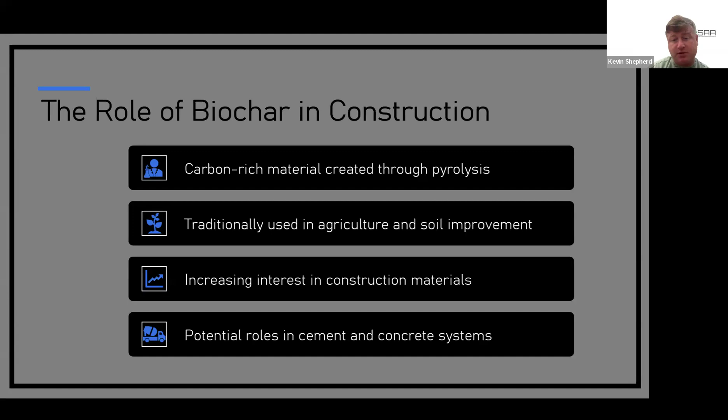In the standards that are actually being made, this is how it's going to be defined for biochar in concrete, right? You have your supplementary cementitious material, which is a partial cement replacement, which gives you a lot of your data for your GWP. We are also looking into replacing sand in urban dense cities like New York. Sand is harder and harder to get, and people are having to make more sand or alternatives to sand. So biochar could be replacing sand in some applications with some different feedstocks.

And honestly, the CO2 reduction. If you have a cement replacement and it's carbon focused, I think you have a better product than if it's just a cement replacement to replace cement's GWP, if that makes any sense. But what it's being used for in the industry is to reduce the CO2 in the concrete mix.

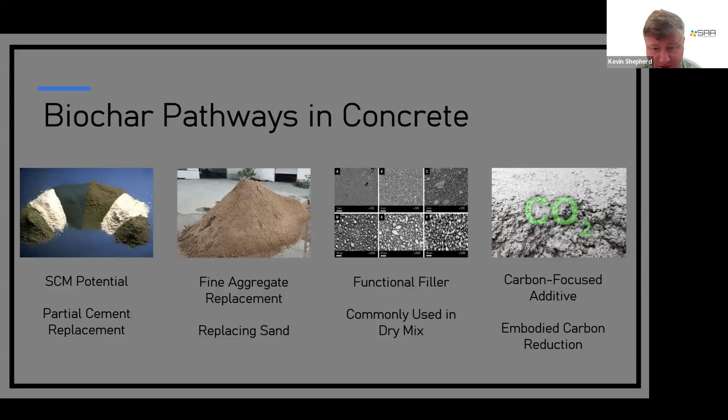So my opinion on the challenges: I think there's inconsistent product claims. I think the market messaging is being held up because of some of the stories being told, and I'm not pointing fingers, but sometimes it's a lot of snake oil trying to get carbon credits and things like that. Where in our industry, when structural components matter, that kind of ruins the reputation of it.

Limited standards and testing framework. We can't scale without these standards. We need testing methods. We need standards of those testing methods for performance, and they're not quite there, even though they're being made. Prices vary widely across producers.

So, in my experience, and I'm not going to ever name names, but I've been quoted anywhere from $200 a ton to $850 a ton to $2,000 a ton. If we want to impact the market, we kind of need to come together and make sure that our prices are kind of close, right? That's a big reason why a lot of people are turning their heads to it.

Engineering guidance is still developing. All these materials, all these feedstocks, which I'll get into, there's a lot of engineering to it. We're engineering it to the application that it's being used for. We can't just do the same process and put it into building materials that are structural, right? It needs to have a lot of engineering to it to keep it consistent, so that materials could be used consistently.

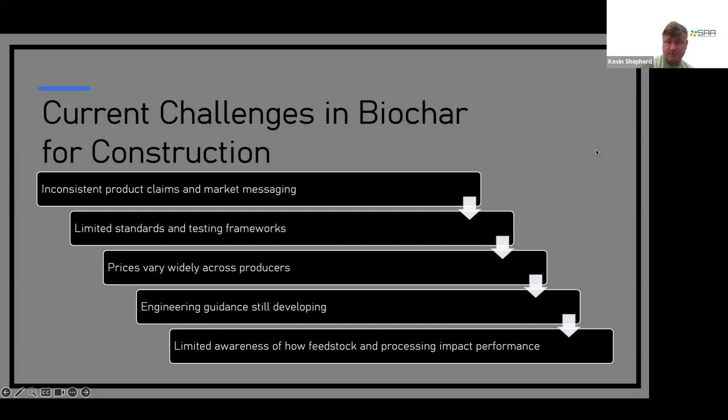Okay, why the biochar materials differ and why that consistency matters and why the engineering matters a lot is the feedstock. Right now, the big topic is rice husk. I know we mess with softwoods, hardwoods, contaminated woods, and municipal solid waste is coming out, and we have different types of agricultural waste from different Brazilian peppers and all types of stuff that we've handled.

The pyrolysis is different. You have fast pyrolysis, slow pyrolysis, gasification, all at different temperatures. It's being studied right now how this actually works, but there's no actual solution and actual guideline of how to pyrolyze this to be good for construction materials and low embodied carbon materials. Your particle size. From what I see, particle sizes are all over the place. And when you try to get to a certain particle size, which we'll talk about, it could ruin equipment. There has to be engineering, there has to be processing.

The chemistries, the physical chemistry to this from stuff that we're testing is all over the place. It's different. Sometimes you have high silicas, sometimes you don't, sometimes you have good reactivity, sometimes you could read high carbon, sometimes you read low carbon. So this is what is the concern, and I know everybody is aware of this, but we have to kind of come together and talk about this if we want to make it feasible for an industry like concrete.

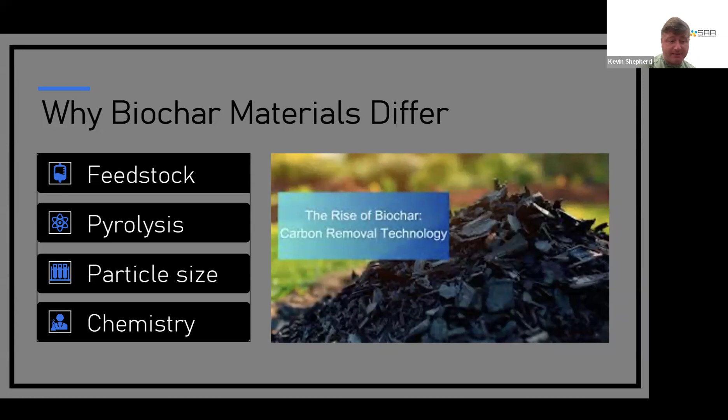So processing pathways for construction application. Pyrolysis and gasification: what I'm seeing is slow pyrolysis and fast pyrolysis are the best materials for this. Best controlled, best consistency that we've tested. The feedstock variability: we're kind of limiting the feedstock in the concrete industry to be high in silicas, high in carbon, or engineered almost like a geopolymer cement where a couple biochars are blended together.

Grinding and particle size control, that's a huge thing for the process. I think if people are figuring out what screen size and how to grind this without maintaining equipment and keeping that equipment durable for a long period of time, that will impact the price. Keeping consistent particle size that isn't too fine, that isn't too expensive, and finding the balance between moisture and performance really and particle size.

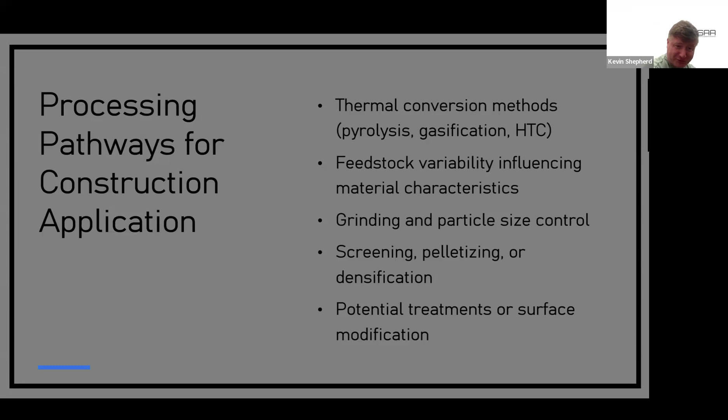Screening, you could pelletize this stuff and you could also densify it, right? So there's different applications and different processing to get to that particle size. And then you may even have potential treatments for the particle size and the surface modifications to this stuff. So I guess what I'm saying here is in order to get to the application of construction, there is a lot of research we are doing.

How synthetic aggregates supports biochar in the construction industry is we have a lot of representation on the ASTM biochar in concrete standard that's being developed. From my knowledge and from my experience, I think it is being developed a lot quicker in ASTM than your average. I think there's a huge push on it.

I know Lori Tunstall from Colorado School of Mines is leading that, and some of the industry support that are a part of SA, like ZeroTwelve and Solid Carbon, are a heavy advocate in that biochar standard, and they have experience, which we'll go talk about.

The advocacy for inclusion of carbon-based materials in non-structural applications in city specifications. So getting involved with construction specifiers to take it to the city where they could require using this in sidewalks, using this in blocks and stuff like that for certain government projects or city projects that they want to do. I think that's huge.

I think what we're missing there is actually people understanding how to specify this stuff. Before it even has a standard it is hard, but there are ways to specify it and actually go to the cities and get them to use this. But you need the data, right? And how do we get the data? By collaborating with researchers. I know I skipped the point there, but we really do need to collaborate with the universities, collaborate with the industry, and collaborate with the corporations and small businesses.

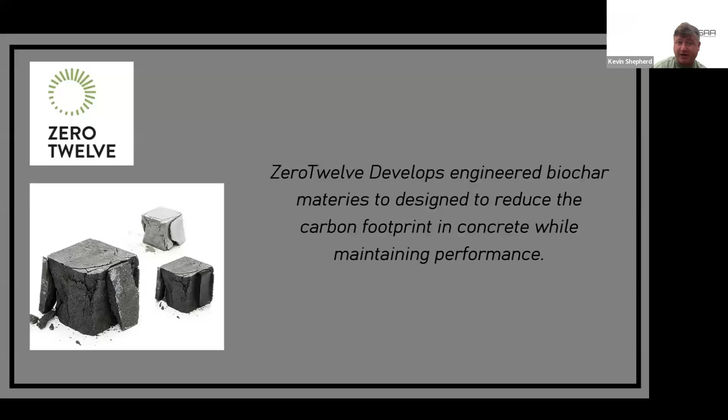So it's great to see a company like ZeroTwelve a part of SA. I think a lot of you, if you're into biochar, would know about ZeroTwelve and what they're doing, but I just want to give recognition to a couple companies that are a part of SA here. They're located in Colorado. So if you ever need anything, feel free to reach out and I could connect you. Solid Carbon is also somebody who's engineering biochars to incorporate into concrete specifically.

Ferris Engineered Wood up in Oregon as well. I didn't really understand how a cogeneration plant made biochar as a byproduct until I went there and saw it. It's a very cool operation; they actually supply power to 10,000 homes around them, and they do mass lumber. So they build really cool stuff, and they have this waste, and there's a lot of it that they're trying to get rid of right now. They're in the agricultural industry a lot, but they're trying to push their way into the construction industry by testing and modifying their process and how their char is produced right now. Well, not produced, but I guess delivered to the end client.

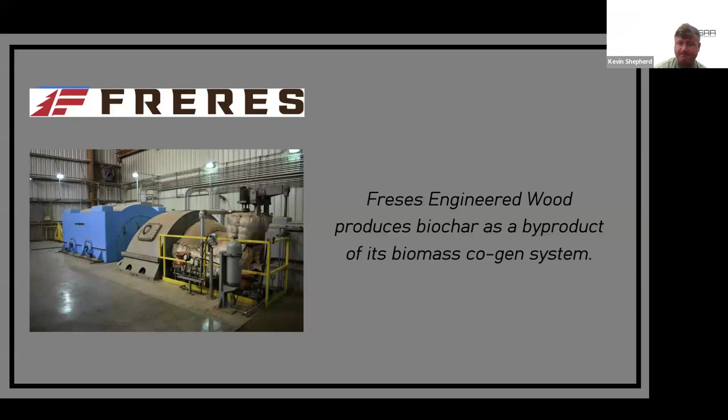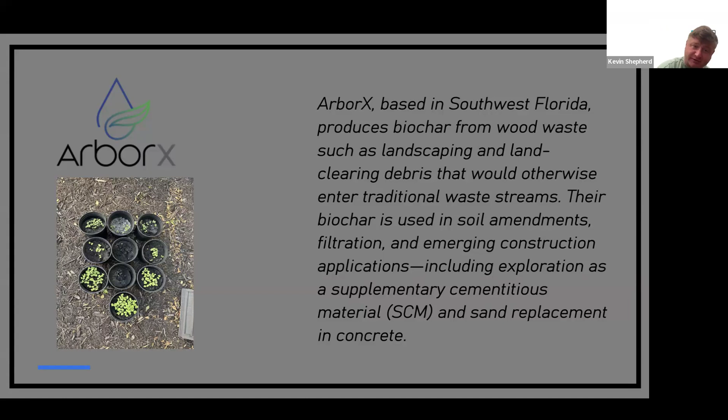ArborX is in Southwest Florida, near Naples. ArborX has a machine called the Char Boss, and they've got it up and running recently where they're taking clearing debris from land out there, different types of waste streams from Brazilian peppers to different types of agricultural products. They've done a great job recently working with carbon credits and getting into that system, talking to some of these data centers, I've noticed, but they are trying to get into actually creating a product for supplementary cementitious materials and sand replacements. So they're starting to really become a leader in the construction industry for biochar as well, for concrete, and looking into it at least.

Kevin Bernard with Mobile Biochar Systems. Kevin does fast pyrolysis, and he has a very unique type of system. He can make a kiln pretty easily and bring it to you mobile, right? For small scale operators to produce biochar and avoid their waste. Kevin and I have been working together to try to figure out what type of materials he produces with fast pyrolysis I could take and introduce to the industry and see how that performs and how that data looks.

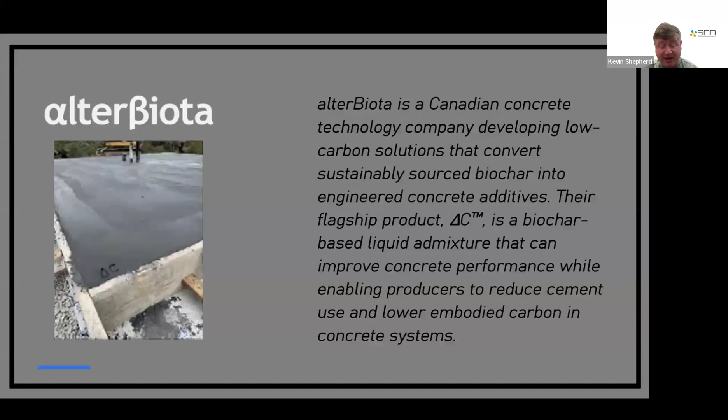alterBiota is a Canadian company who has a liquid concrete admixture with biochar. It's suspended. And as you can see over here, they get that really black concrete that I like. So I think their product is, like I said, leading in the industry with the standard. Alex Hanmore over there is a very good technical writer, good for lobbying, good for getting this into standards. And I could see this company really doing a good job with this concrete additive in the future. It reduces cement and it has a lower embodied carbon than typical.

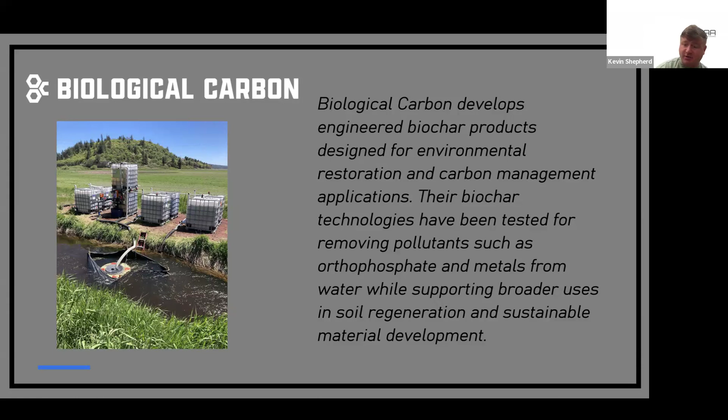Biological Carbon is also out in Oregon. John Miedema is honestly one of my mentors, and he engineers biochars for all different applications, water treatment, soils. He looks into the arsenic that's in there. He looks into the phosphates. He is a real good mentor of mine and has taught me a lot of what I know. He's told me where the snake oil is. He's told me what the problem is with it, and I see him working daily to solve the problems of the biochar industry. And another reason why, when we started synthetic aggregates, we defined biochar into this is to support his research and the stuff that he does. He's been doing some really cool projects all around. So if anybody ever wants to reach out to him, feel free, or bring any questions about them to me as well.

And once we start selling this product, so we've done great collaborating. In the Synthetic Aggregate Association, a lot of these biochar companies are working with each other, listening to each other's advice, and actually trying to explore different options together. So we're not taking it as competitive. We are actually trying to develop the market.

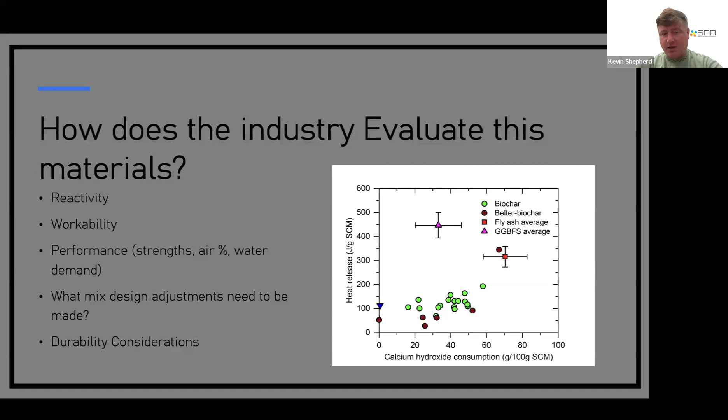Durability considerations. A lot of the companies that are in our association are looking into it, but I don't see a lot of durability considerations around these materials. However that's tested, I think we need to prove that when this material goes into concrete, it will last the same as that old mix design that we are at. And I do see some issues in the field with this, so that's why I recognize it.

The challenges with the carbon-based materials is kind of what I was just getting into, but the water demand, the air entrainment, the workability, and the consistency are a huge thing for engineering this right now. It's hard to balance those three when you're making these products, but I mean, it has been proved that it could be done.

But the processing cost, what is the ROI? What is the CapEx? I think these have been a real struggle for some companies to figure out, especially in today's economy. Transportation, where is the material going to go to and how far? For it to work in construction, it really needs to stay in a 100-mile radius. A lot of people will say 500-mile radius, but not when it comes to concrete. Concrete is kind of cheap. It's a low value product. We need to keep it low value in order to sell this stuff. So we really want to be looking for offtakers and feedstock suppliers around that 100-mile radius of wherever we're processing this.

Blending cost. You're gonna have to blend this stuff either before or after with some things, in my opinion. It's happening, and I think that's what we need to look at. And the cost actually at the blending plants as well, or batching plants, if they need to put any investment in to actually move this material.

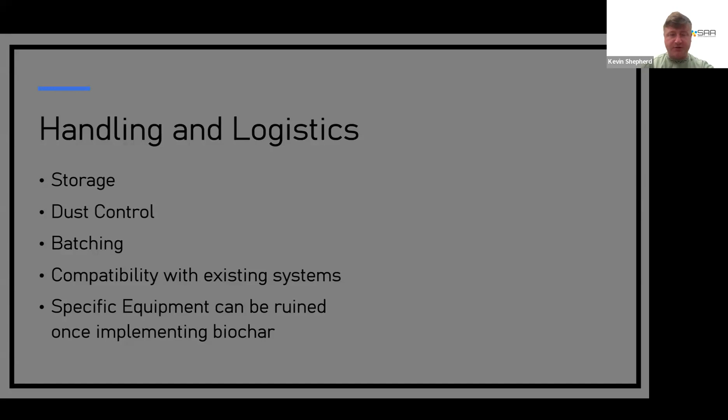This all needs to be researched and looked at before, because if we're renting rail cars and we put biochar in it and there's a little bit of moisture, it could ruin that rail car from ever putting anything else into it, right? Or that pneumatic truck that we're getting from a broker, unless we buy our own trucks, which puts the price a lot higher. Again, this is the stuff that I see in the field, guys. I love the biochar. I am telling everybody the concerns of the things that I see in the field.

What do engineers need to see? They want to see test data. I know I said the engineer is the most important to raise awareness to for this product in the beginning, but once you say where's the testing, what are the performance benchmarks, what are we looking at here? What's the long-term durability? What test methods did you use? Whether it is for the road or the pavements, did you go to NRMCA? Did you go through ACI? Did you go through ASTM? What ICC testing? What methods did you use? They want to understand all that.

And that becomes expensive for these companies that are trying to develop biochar. A lot of the companies that are developing biochar have the feedstock to biochar, but aren't in position to do $1 million worth of testing or $500,000 worth of testing to actually understand this product. And that's what the engineers are going to want to see.

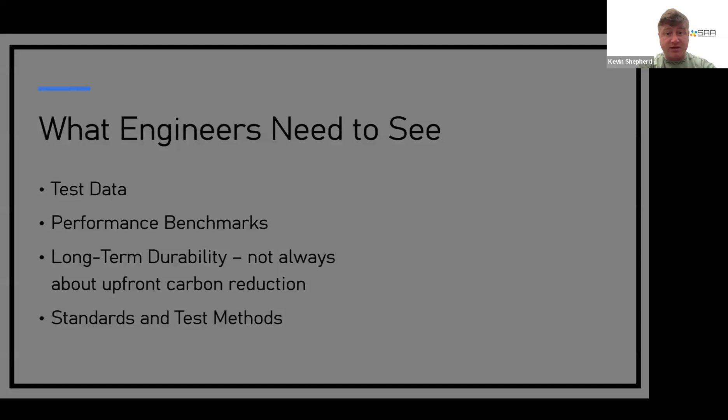All right, I've been talking a lot, so I'm coming up towards the last of the slides, but I did want to go over some of the other companies' work that are within SAA and go through it real quick with you guys to show you the potential that's out there. Agriplex is a ground glass company. They actually make ground glass as an SCM, so they would be almost a competitor to biochar right now. Rebind makes fibers out of baling twine. They take the ropes from the baling twine and make it into an applicable fiber for the concrete industry.

Local biochar, now mobile biochar with Kevin Bernard. Reboom America is a screening company that we've used for some of these aggregates. Agsco is up in Pennsylvania and could blend some of these materials together. Outside the Box Materials is making a unique cement replacement that's low embodied carbon, also looking into some of the biochar products. Climate Earth is a part of our association to tell us that these materials are low embodied carbon, and they do help out a lot of our clients.

North American Composites, thermal composite systems, where some of these materials actually thrive in those thermal composite systems rather than just concrete, cement, or mineral board making. CRDC Materials, plastic aggregate. University of Miami does a lot of our testing and evaluates most of the materials that come through this association. McLanahan is a company that takes construction and demo debris waste and comes up with processing to recycle that into clean, valuable alternatives for products.